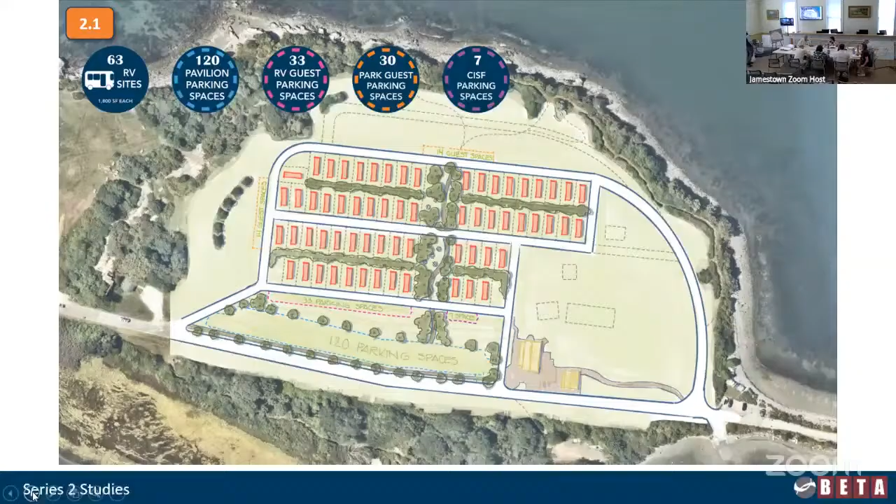Hello everyone. I thought we'd just kind of flip through where we were with what we were calling the series 2, which you saw get released. And at the last session, we essentially made some edits and came up with what we're calling the series 3. So we can jump into those and I'll walk you through a couple options. Okay.

Thanks, sir. So all these concepts assume that RV camping continues, with the goal of freeing up or creating more green space around the perimeter at the edges of the park, and that tent camping is consolidated down to the area by the gatehouse. So we're taking the work that we did previously and advancing it forward.

And I know Bill's not here, but he had put some ideas together around the concept of 50 RVs in the campsite with more green space to the north. This isn't exactly his plan. His sketch is in this package. But this is one of the concepts we walked away with, consolidating down into that center space, essentially with 50 RVs.

Perimeter loop road around the side, parking, green space to the west and green space to the north. And this one we called 3.1. I just want to say that because it was also raised in public comment and because we've heard a lot from Bill about this, that my understanding, and I think our understanding has generally been that our conversations about options happen here in public session, primarily during these workshops.

And we've been afforded a landscape architect to help us think through. We may have great ideas that he will say, well, this is what's required to do that. I mean, he brings his practical expertise and experience and knowledge to our process. And so nobody is getting their design drawn for them. We're discussing our concepts and ideas here, trying to come up with some generally agreed upon, we may not reach general agreement, and then guided by Beta, developing options that seem feasible. So that's my understanding.

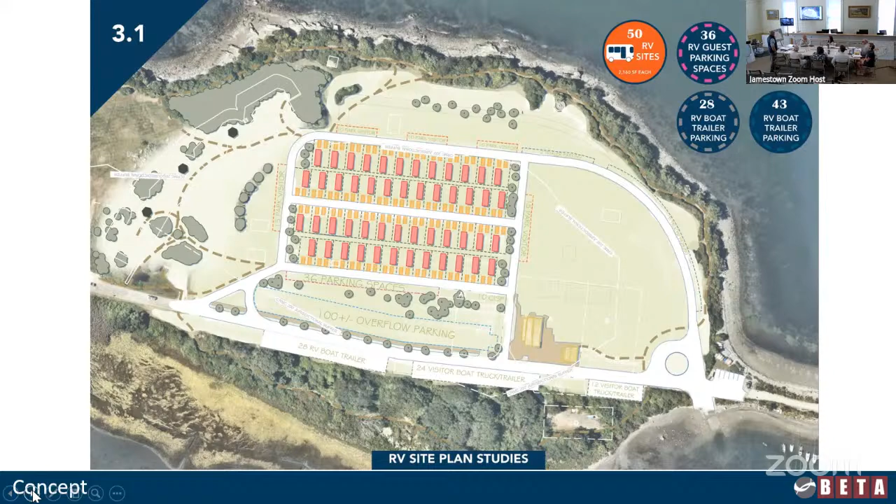I don't want to normalize anything here. Walking through, you can see some of these geometries then start to expand to the north as we look at adding. So it's still the idea of the green surrounding; you can see a little bit of pressure on this corner as this comes down. It sits to the north and west, but the idea is, what kind of yield can we get? Still keeping the idea of a central core, green space around it.

And then I think Rich had the idea of saying, look, if you're here and you're looking at RVs anyway, it's already contributing to the center concept of the RV camp. Can we add this outer band to gain additional spaces? So I think this sketch was developed in response to what if we added some here, but tried to maximize the green to the north. And we don't have to develop too much. I know you want to move to other things, but this is the look at that concept.

Go ahead. No, go ahead. A concept that's similar to if you left the park roads alone and put the limits like that. But if you brought the 36-foot wide site back to 30, you could technically put in 72 RVs, so whatever's there, 72, 75, would fit in that footprint.

If you reduced it, it's about 30, 16 in each row, and then you have 10 on the south perimeter. If you brought the dimensions back to 30, because some of them are 28 now, so if you make all of them 30, you keep 72, and it would fit in that footprint, pretty much.

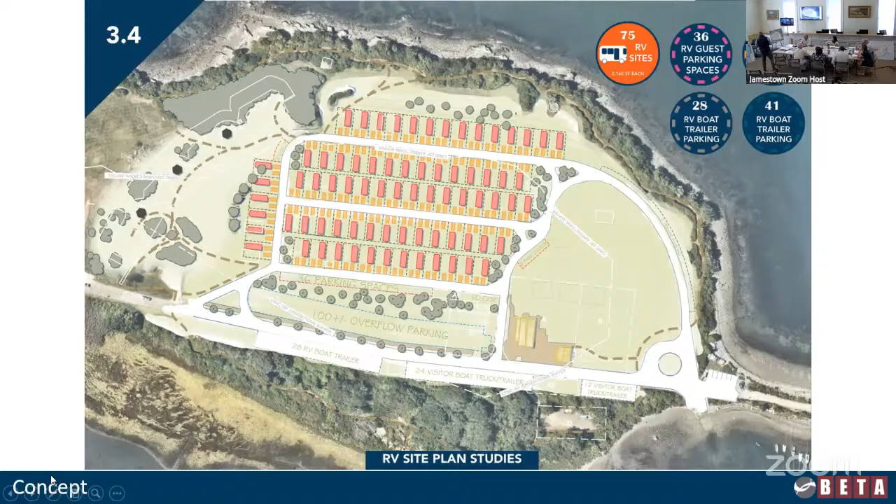So, and just to put this in discussion, this was Bill's sketch, circulated. And he and I had a couple email exchanges talking about sort of pros and cons of this idea. There may be a new version of this, but this is again just to kind of consider the goal, which is really aligned with some of these earlier ones. 50.

We have the green space to the north. He has parallel parking down here, the more expansive, that's probably more realistic. He's also got RVs on this side of this road, and then pretty intense RVs and a new road up in here with a parking lot. Some of those elements I think would be challenging.

So if we want to draw that, or if the direction is to draw that, we really want to talk about some of the particulars. He and I have been through, we should go through this as a group. When he was presenting his idea about parking lot, I think that ends up being at the top of this corner. I think it's challenging to build a big parking lot like that, and maybe not the way we want to serve. So anyway, that was sort of the underpinnings of 50 and what 50 might look like.

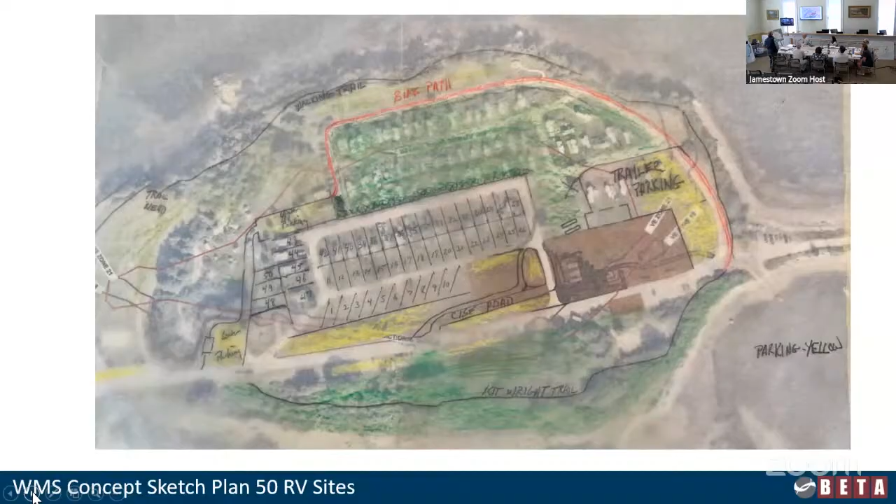Go to the next one. Again, this was just kind of looking at the overall distribution of the sites today. And so what we were doing, kind of subtle adjustment, but shows up in all of these scenarios, is the elimination of that road on the far west. It's the elimination of this road and also sort of reorganization of the roads in here too, so you can see that kind of sawtooth pattern.

We're looking at pulling this road and just getting a more efficient layout through that edge. And then again, everything outboard of that would be sort of public, and depending on which alternate you look at, either camping inside the road or something.

That southerly east-west road, how does the drawing on 3.4 and actually all the other ones, I guess, in series 3, is B shorter? I'm just trying to figure out whether you extended the road up between B and E or whether you brought it. Yeah, the road today, that's kind of hard to see what happens. It's sort of in here. It does this and kind of comes down through like that. So that's how we sort of gained that.

Yeah, okay. That this layout, which is given over to tents and RVs now, right, with some parking there. So sort of gaining high ground, from an organizational and circulation perspective, it just makes the flow for boat trailers, and this is just challenging and maybe unnecessary. Well, so it sets up the land use a little bit better. Then we looked at the layout, next one.

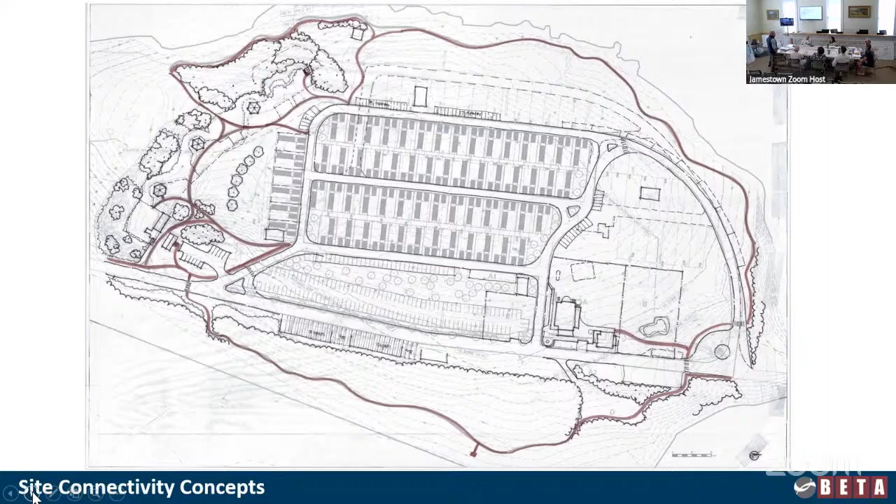Great. Big picture stuff. Yeah.

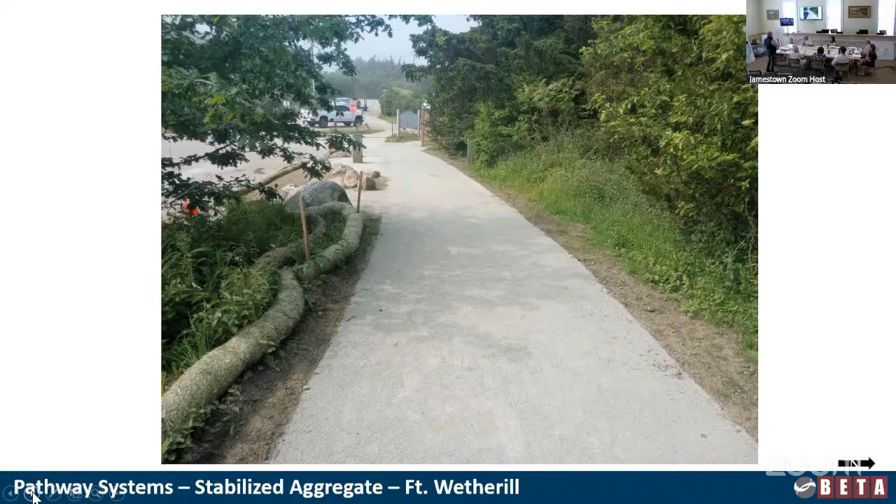This is the area where just down below is the parking lot here. What we're looking at is this bay parking. And there's just a little bit of space there that's sort of lost space. And again, I think there's a way to bring the path through here, so we'll get this connection up, and try to make this connection across so that we're not dead ending in this parking lot or sending people back out into traffic, but we're trying to make this coastal all over.

So because this is a mixing zone, I think we probably would be right to talk about different surface treatments. I think we talked about a larger paver, maybe a texture in that surface, maybe certainly by CISF, or as we approach the turnaround, just to visually and tactilely slow down vehicles so that they're not moving through that as fast as they are.

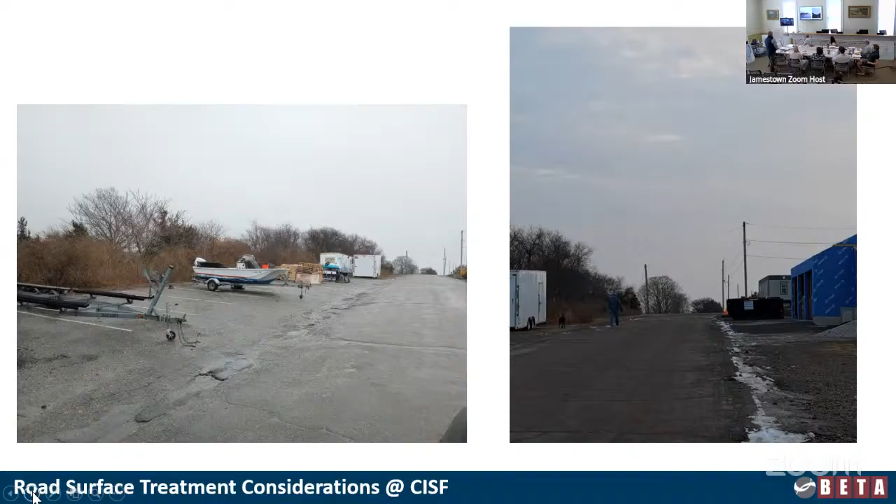Next image. This is something we just put together. Maybe you've seen it. Could be as simple as street art. It could be something that CISF did in front of their windows, painting on the road. Visually, people slow down and they see something. So I don't think we need to do speed bumps or anything like that. I think we can just look at surface treatments.

So this will work our way into the big picture recommendations, but thoughts about how to slow down people and kind of control, particularly north of this river. To the north of it. And then the beach itself, I know you had asked a little bit about the beaches. I want to talk a little bit about site amenities and some thoughts on those.

The kayak racks that are there and the dinghy racks, they're convenient for the users, sort of optimally convenient, but they really create a visual barrier to the water. Visual access is pretty limited. And actually physical access is kind of limited too, to about 3 feet between them. And so I think there's another way to orient the racks, whether it's a herringbone pattern or something like that, that allows them to be slid out.

I'm sure we can develop our own design, or we can modify these or the other rack systems that are out there, but to get something that still gives good access to the water, but visually just opens up this area. Next slide, please. There's also sort of space behind them. I know there's that overhang, but if they get positioned right, if you look at the existing vegetation, I think it can even be manipulated a little bit to open it up and make better use of the space that's there.

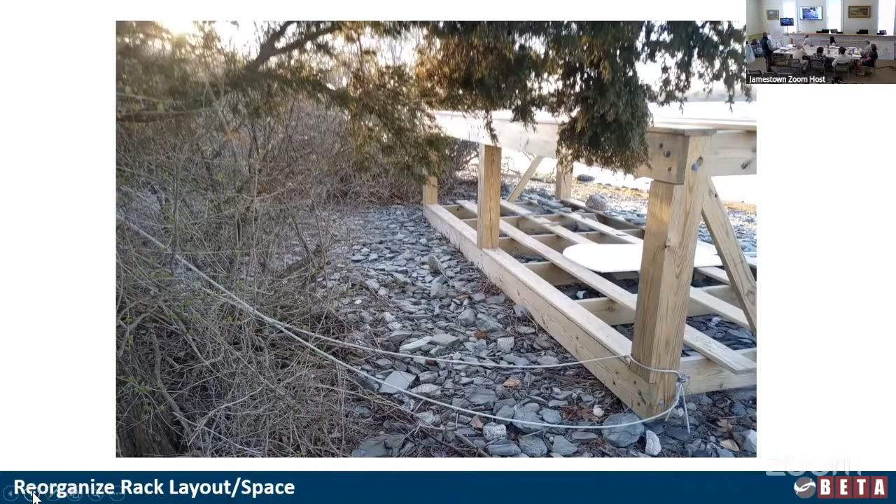Next slide. This is an example. This is a fabricated rack, so it's probably steel, maybe PVC, but visually they're much lighter. So the point on these is that when they're not full of things, they kind of go away and disappear. I think the one on the right is for paddling. So this doesn't work in every instance, but instead of timber and lumber, we might be able to look at racks that just visually disappear in the off season. Might be something worth considering.

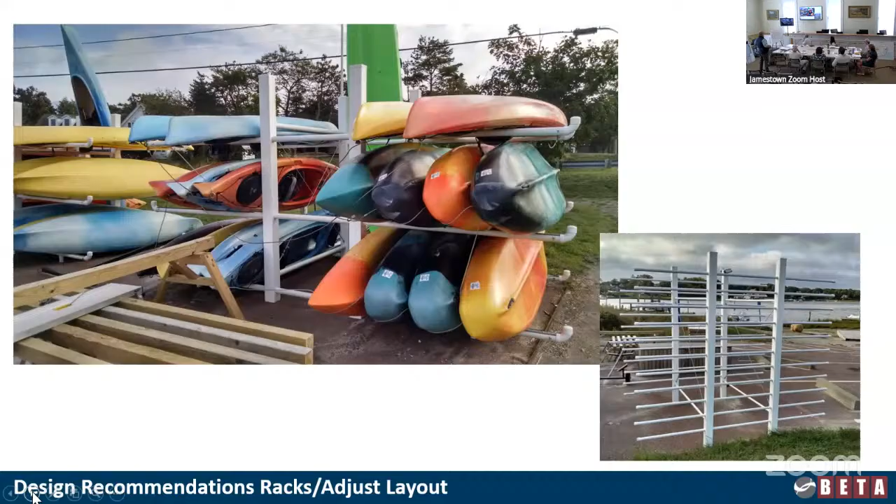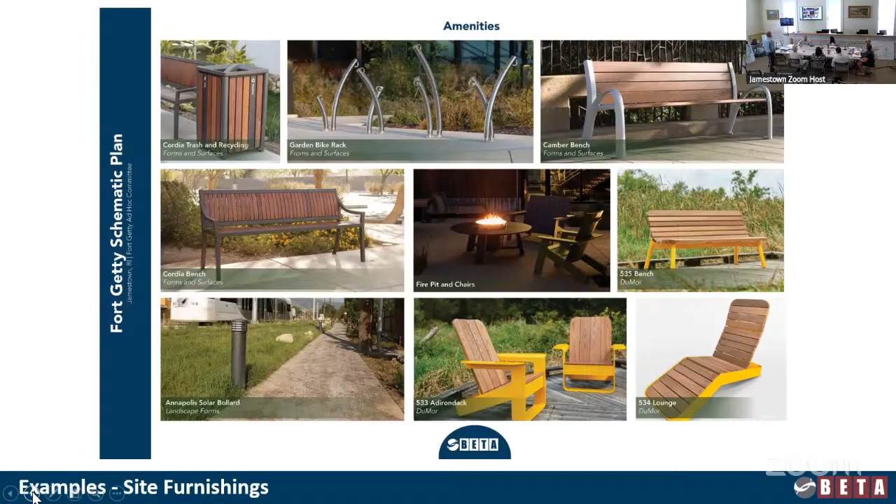Also, there are some options on solar powered lighting. There are some lighting options on solar powered poles where the pole itself is photovoltaic. So it means no conduit, no electricity, but it can provide low level dark sky, full cutoff illumination. I'm not sure about the style. That's a bollard that we used before, but it shows an extra footpath. So it provides a really cool light. Maybe on Fort Getty Road, or in certain challenging areas, it might be nice to provide a little bit of light. Again, maybe in our future set of recommendations, but a general framework for some thoughts on this.

Also, we talked a little bit about the pathway systems. I think the clam shells at the top, exposed aggregate concrete, would probably be appropriate for the harder surfaces, like wood benches and stabilized aggregate. I gave you examples of those. The beach access, the rollout style. I think maybe we need to deploy more of those to make the other beaches more accessible. Signage, we'll talk about that a little bit more.

Interpretive panels. Selective use of split rail fence, coupled with plantings, can provide some definition we talked about today. Also, that has a pollinator meadow in the background, so part of what we'd be envisioning is some habitat creation. So maybe some areas that are less known that we dedicate back to the creation of habitat. So that kind of visual where you have a mowed area, which is more public use, and this we're going to naturalize, like the area by the nature trails we talked about, mowing down to that marsh. I'm not sure we really need to do that in the future. We can maybe green that up and commit that over to habitat.

And come up with a concept like that for some naturalized areas. And then the reinforced turf I've mentioned is a geotextile, a cell or a geogrid that holds and stabilizes the soil, and then the grass is seeded on top and mown. It'll support the trucks and trailers. When there's not a truck and trailer there, unless you're right on top of it, it's generally just open looking. So some initial thoughts on that surface.

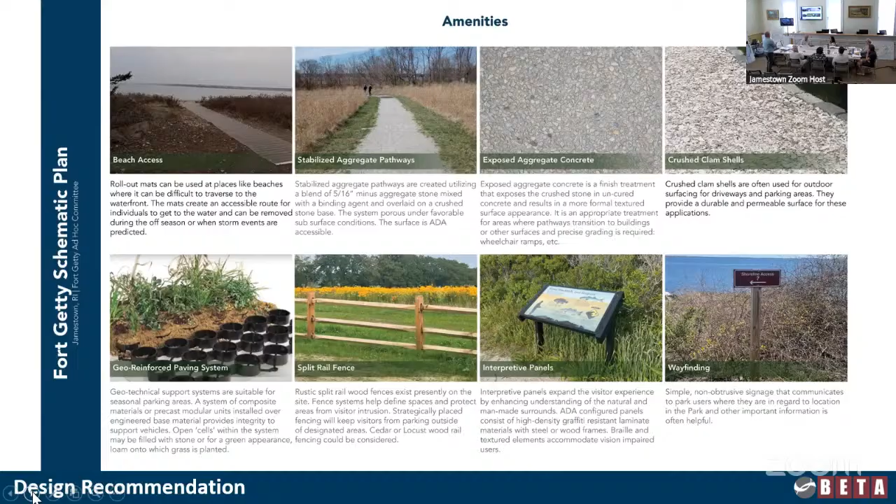Signage, I just wanted to take a look at where we're at, and I think it's a good starting point. And I put in a couple of examples of some of the things that we're working on. I think what happens is signs come along as you need them, and it's part of the policy. And again, I don't know if a full signage palette is something we need to develop right now. But yeah. No, I think the recommendation of having one that kind of adheres to the principles, so it's not fancy. And I think what's nice about that is, what's the right level for the way it's... Go ahead to the next slide.

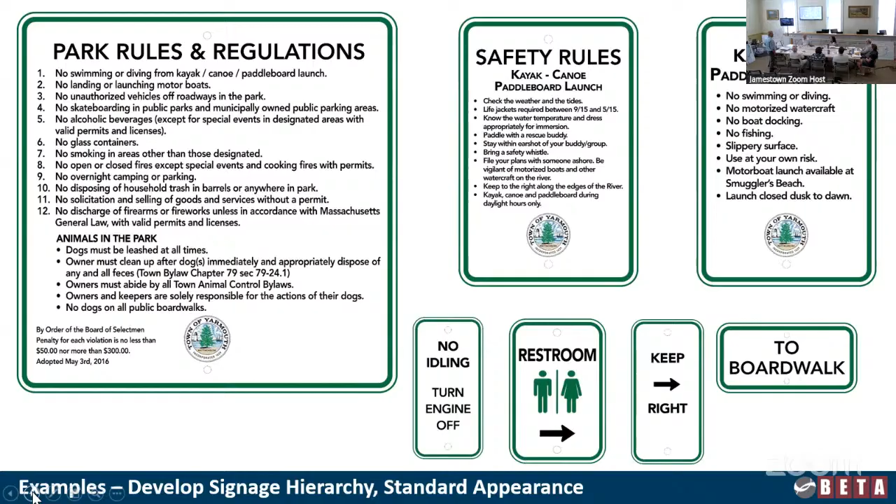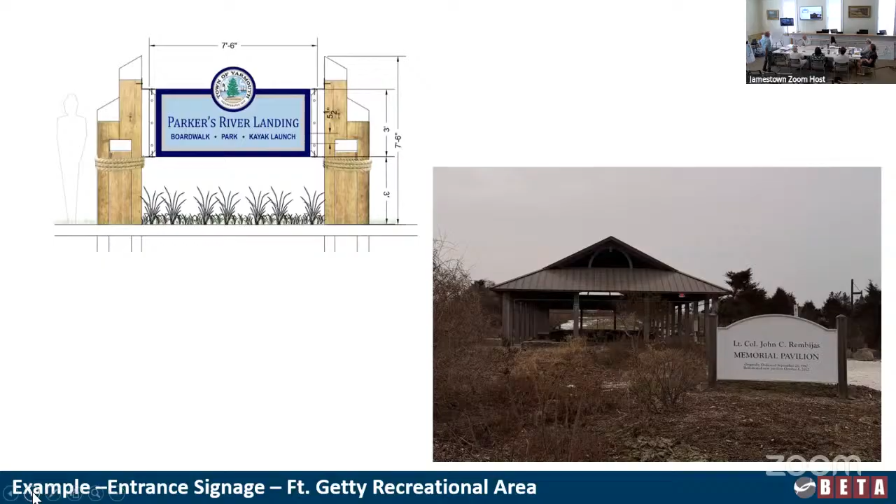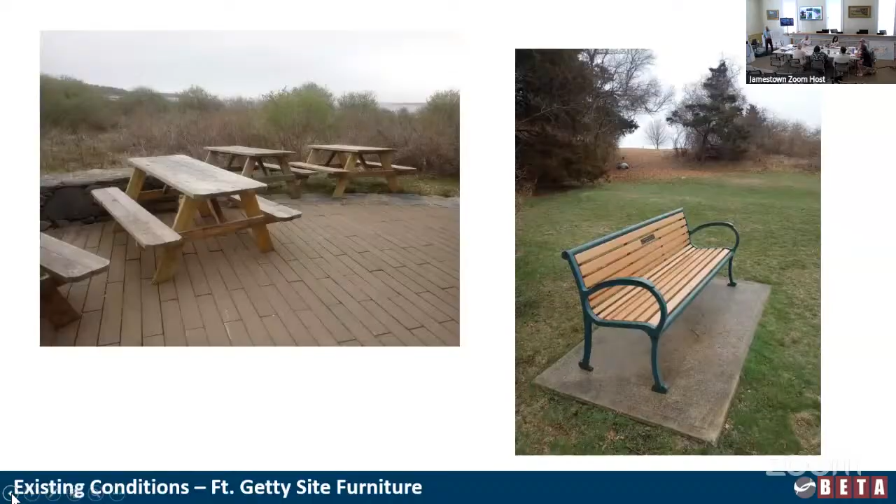But the way it's now, if you keep it 30 on both those two sections there, you would get close to 64. I don't think you'd get 64 because of the terrain on the southeast corner of the lower section, but you could be close. I think if we decide the area, whether it's those two center rows and whether we keep going north or stay in that area south is fine.

I think the way the road pattern you talked about by moving the parking down to, I'm just gonna say the area closest to the main road. The way the traffic pattern would work, if you kept that open as far as parking, it makes sense for people coming into CISF, they turn the corner, they could park. I know it's considered RV parking right now, but I think the distinction of what parking is what parking can be clarified later. Yeah, I can agree with that. But having that loop creates a general central parking area.

So anybody coming into the park makes that loop. They can either park on the eastern side or the western side of that lot. And it seems like it makes the flow of vehicles to park pretty easy. Because you could take a left at CISF, pull in there and park, or you could take the first left after the restrooms and pull in there and park, and then you're centralized into the park. You can go to either beach, you can walk either path, you can join the Kit Wright Trail, or you can go to the trail that goes up to the top of the fort.

And it just seems, as far as parking goes, not to space it all over the place, make a general parking area. That way, when the pavilion's full, you have major parking there. If CIS has a major function, it's all right there. Keep the parking simple, and the traffic just dictates that it's easy in, easy out. But that's probably my idea, just to keep campers off that hill, because then you have traffic going in between rows of campers, and it's going to be a lot of traffic first thing in the morning and end of the day, running in between two sets of campers.